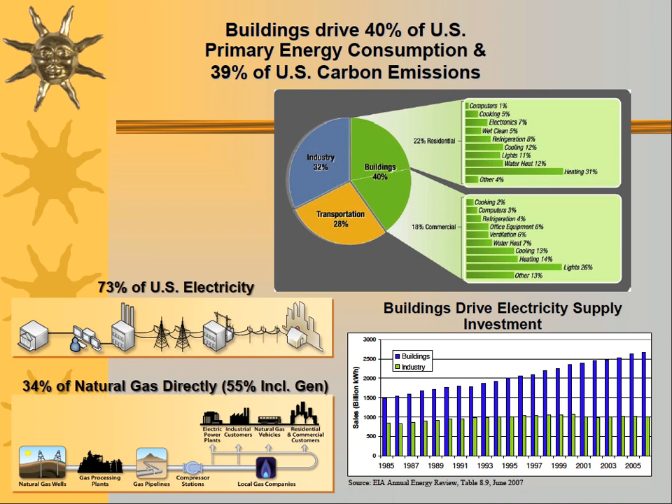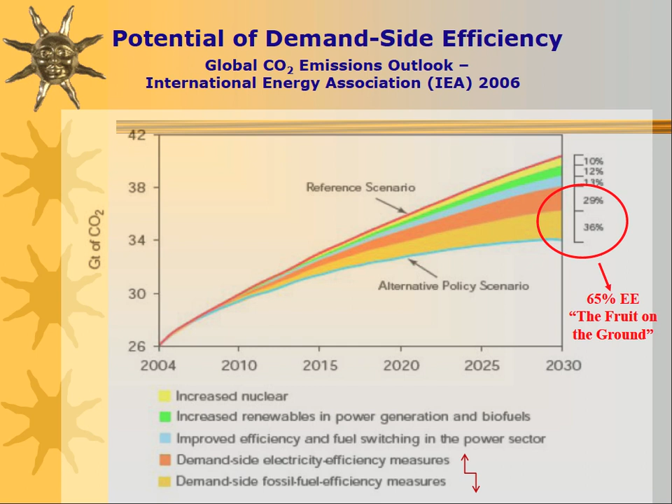Well, how do ground source heat pumps meet that objective? Ground source heat pumps, for lack of a better term, are a lever. 1 kW of electricity from the grid combined with the energy that can be stored or moved from the earth can deliver 4 to 6 kW of heating or cooling to a building or a structure. Or a simple way to put that: ground source heat pumps are 400 to 600% efficient.

So if you replace a system that is less than 100% efficient, for a conventional furnace, or a system that has a lower EER or SEER,

with a ground source heat pump, you can

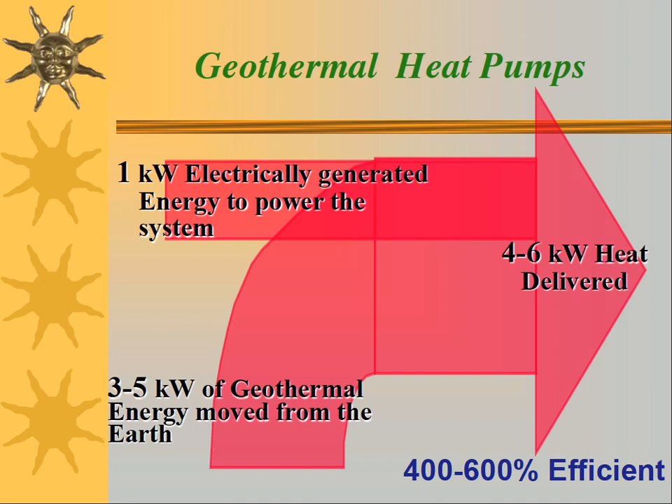lever the grid and lever that electricity to meet these energy-saving goals, and energy converts to carbon. So this is another chart that shows the same thing. This is a residential chart. Across the country, on average, heating and air conditioning accounts for about 60% of a residential home's total energy use, and hot water adds another 13%.

Well, if you put a ground source heat pump on that home, the loop takes almost 50% of that thermal energy out of the building, because that energy is coming to and from the ground. And now the remaining energy footprint of the building, the heating, air conditioning, and water heating, becomes almost the equivalent of the thermal loads associated with lighting, appliances, and miscellaneous plug loads. So ground source heat pumps take half the energy that would normally be consumed by a building. They convert that to renewable energy from the ground, and that's how we get energy savings and carbon savings.

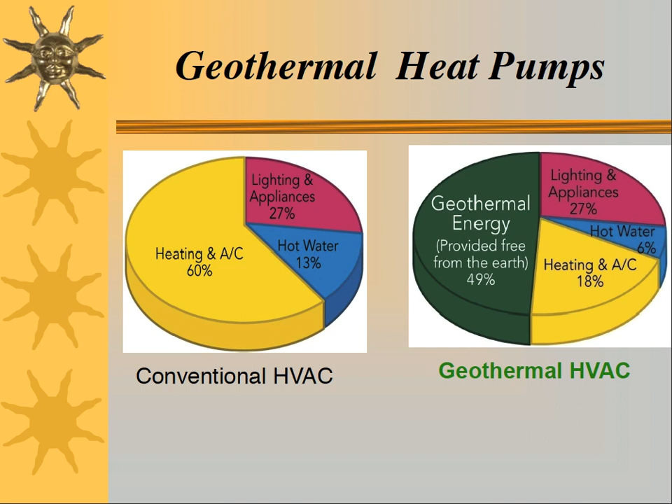Now, we've known this for a long time. This is a study of what was, at the time, one of the largest geothermal retrofits in the country. This is Fort Polk, Louisiana. This is data from the Oak Ridge National Laboratory, and the report was sponsored by the U.S. Department of Energy. There was a massive retrofit of over 4,000 homes and buildings at Fort Polk. And they went back after that retrofit and actually looked at the before and after energy usage as it was metered for the base. And here's what the ground source heat pump retrofit did.

It reduced 33% of the kilowatt hours that were being consumed by the base. It lowered the summer peak demand of the base by 43%. And it improved the electric load factor to serve the base from 52% to 62%. So in essence, it stretched the system that delivers electricity to the base so that more kilowatt hours were moved over that existing peak. That makes the electric system more efficient, and that allowed the energy company to spread their fixed cost over more kilowatt hours, which is a way that utility companies can keep pressure off of rates.

So this retrofit was done a long time ago. This was one of the first measured data in the country, and these numbers still hold today. And again, the difference in that before and after system energy use equals carbon emission savings. So the folks who study carbon, and again, this is some DOE data, have come to the conclusion that about 300,000 ground source heat pump retrofits would equal the carbon emissions that come from a conventional 500 megawatt coal plant.

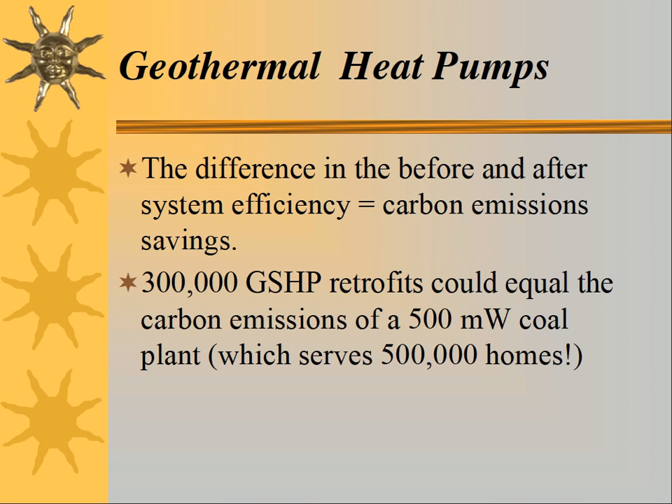Now, when we combine ground source heat pumps with carbon-free electricity from wind, solar, waves or nuclear power, we can have carbon-free electricity with a ground source heat pump, and that goes to carbon-free heating, cooling and water heating. I've done some studies here in Colorado where I'm at, and if a single-family residential home with a 4-ton heating load were to operate on carbon-free electricity, that would result in about 10 metric tons of carbon savings a year for that house due to the efficiency of the ground source heat pump.

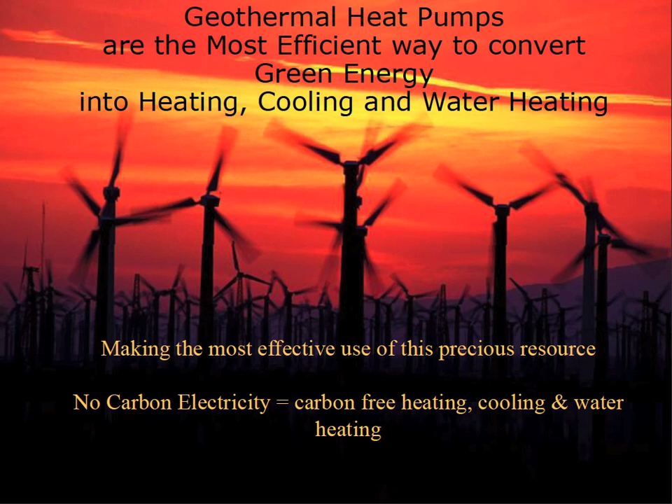Let's talk a little bit about jobs. This is my math on how many folks it takes to put in a ground source heat pump, and I think my numbers are very conservative, but I've come to the conclusion that there's at least 5 jobs created or saved for every 100 homes that are retrofitted with geothermal heat pumps. Other numbers I've seen range from 8 to 10 jobs per 100 retrofits, depending on the assumptions people make.

But at the end of the day, if we start doing more and more ground source heat pump retrofits, we'll create jobs, and those jobs will be in the construction trades, and that'll help put people back to work. And the construction trade unemployment rate is very high right now, and it's a significant contributor to the high unemployment we face as a country.

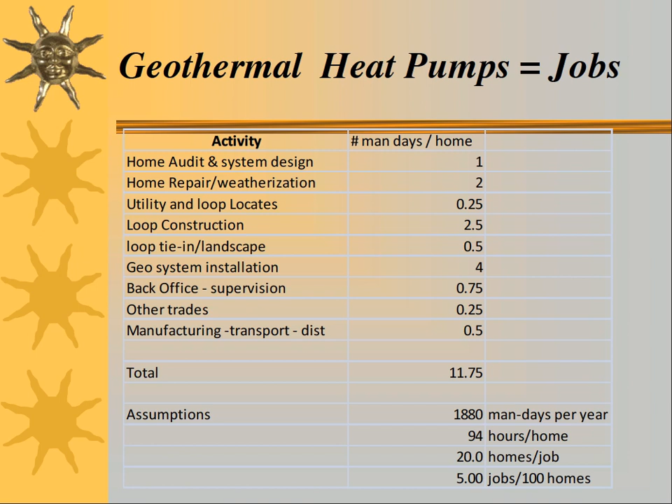Now, there's been over 1 million geothermal heat pumps installed in the United States and Canada since the 1970s. And actually, ground source heat pumps have been going in since the 1940s and 50s. So we have a strong base. The technology has been proven installation by installation over the past 20-some years. And so it's not like we're talking about a new whiz-bang technology that we need to learn about. This is an established technology that's been around for a long time.

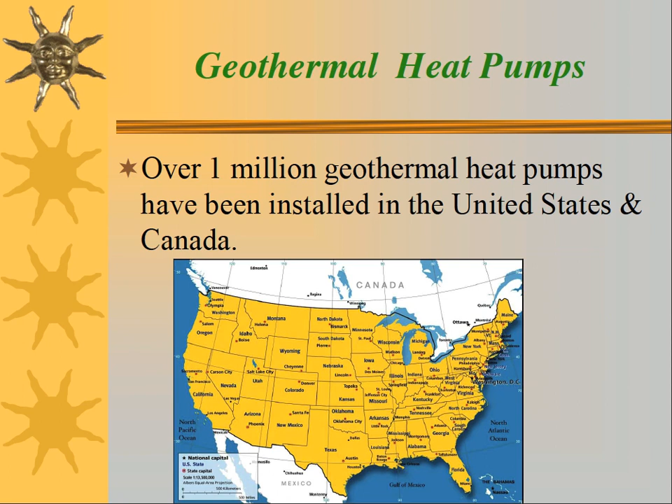There's some initiatives going on in Europe that will actually accelerate this even more. Great Britain has announced a 1 million geothermal heat pump retrofit initiative. So why are the Europeans so far ahead of the United States on a technology that really started in the U.S.? Well, the North Sea is starting to run out of gas and oil, and the next alternative for heating fuel for residential and commercial applications for Western Europe happens to be Russia.

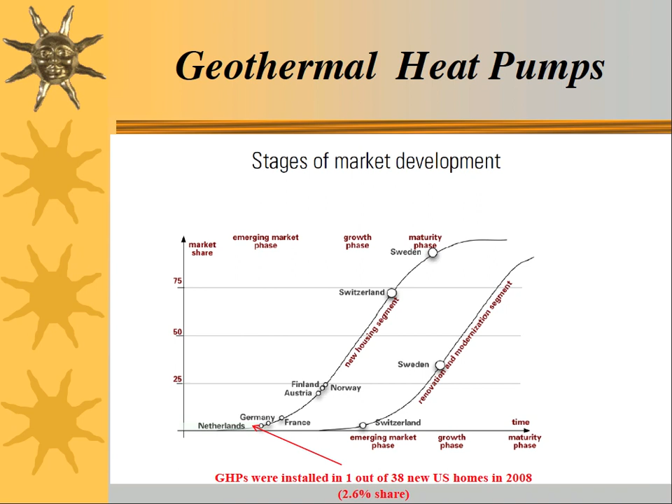Well, not to be left behind, the United States, through the Department of Energy, has decided that they really want to see ground source heat pump growth in our country. So they've announced what they call the industry roadmap for growth, and they want to see 1 million ground source heat pumps installed annually in the U.S. by 2017. Now, that would take about 3.3 million installations to get us to 2017. There's about 1 million units installed now, so between now and 2017, they'd like to see 2.3 million more installations. So that, again, looks like a pretty strong market incentive, and I'm glad you're here to listen on how you might be able to take part of that.

And why is this goal important? Well, again, if we go back to this carbon, the calculations are that would save 26 million metric tons annually of CO2, and over the lifetime of those units, if they lasted 20 years, it would be 520 million metric tons of CO2 savings.

And there's their job estimation that says they'd create up to 100,000 new jobs or save up to 100,000 jobs, again, in the construction industry if we hit that goal. Now, that sounds like a big number, but when you compare it to the existing market for heating and air conditioning replacements, that's about 6 to 8 million units a year.

So really the feds are saying if we could get to 1/6 to 1/8 of the current replacement market for conventional equipment, that would do great things for the nation's carbon goals. It would put a lot of people to work and would help people save a lot of energy.

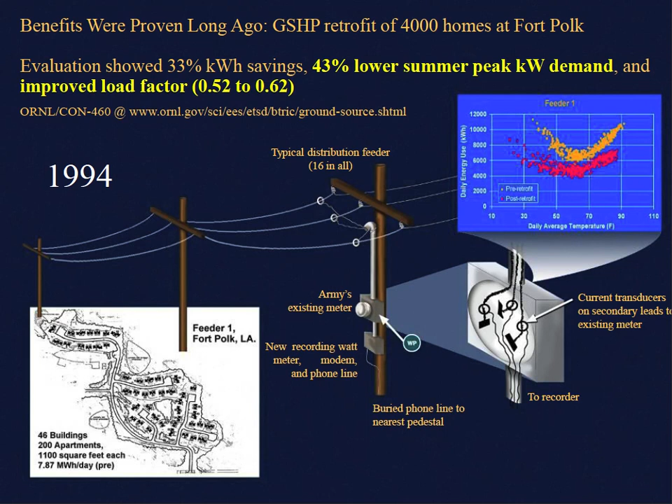Ground source heat pumps can give utilities significant peak load reductions. It depends on what part of the country you're in, but we see 500 watts to 800 watts per ton of installed ground source heat pump in residential buildings. So that means in the southeast, an average house could save 2 kW of summer peak demand, which is the same thing as a large solar PV system.

An improved load factor and all that energy savings result in lower carbon emissions, and basically, ground source heat pumps meet these big efficiency, renewable energy, and employment stimulation goals. And ground source heat pumps are the only technology that can do that without putting pressure on electric rates.

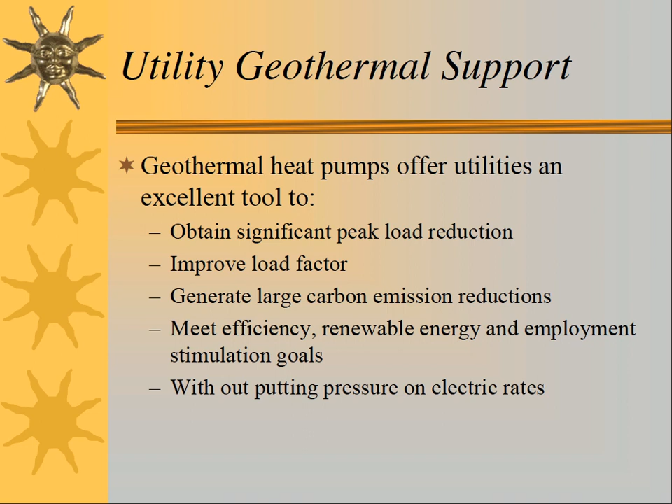Now, I don't want to be a spoil sport, but while most of us are trying to come out of this economic slump, there are some folks that actually are looking into the future. In this case, it's the NERC, the North American Electric Reliability Corporation, and they're looking into their crystal ball, and they say, when we come out of this economic funk we're in, we might run out of electricity. We might not be able to meet peak loads.

And so their forecast is, and this is pretty frightening, that in 2017, if the economy gets back to where it was in 2007, Florida, the Southeast, parts of the Great Lakes and the Midwest, and most of the southwestern Sun Belt may have power demand from a strong recovery that could be 8% or more above the current projections, which are based on slow economic growth.

And if that jump in demand occurred in a year or two, the hardest pressed regions could not add enough new power plants or transmission lines to respond in time. That's a polite way of saying if we aren't careful, we could have brownouts and blackouts based on peak demands that we can't meet because we haven't built power plants.

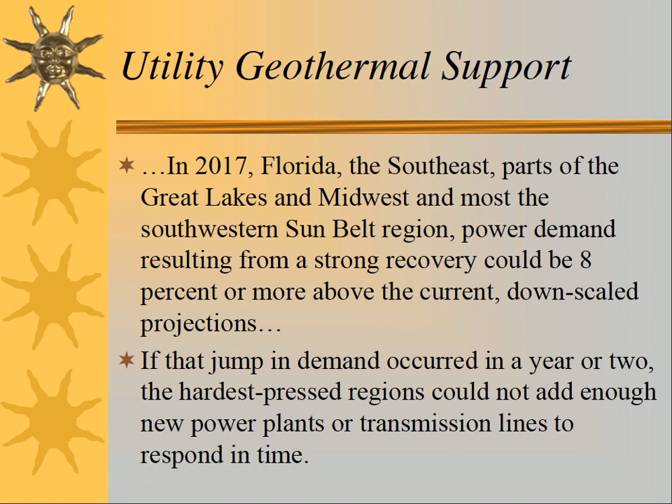Well, some of the renewable energy systems out there, including solar photovoltaics, really aren't producing much energy at 5 to 7 o'clock at night. So the only technology that really clips that peak at that point in time is a ground source heat pump.

Well, Oak Ridge National Labs has looked at all of this data, and they came up with this report in 2008, and they basically said, ground source heat pump loops really look like poles, wires, and natural gas pipelines. And they said, basically, why are we expecting building owners to finance these ground source heat pump installations up front when it should be the same as other utility infrastructure where the financing occurs over 30 or 40 years from utilities?

So if you think back, Thomas Edison invented the light bulb, but then he had to invent the electric utility industry so he could sell light bulbs. We're kind of at that point now where utilities need demand response and energy efficiency, and maybe they're going to have to finance the geothermal loops to make that efficiency show up.

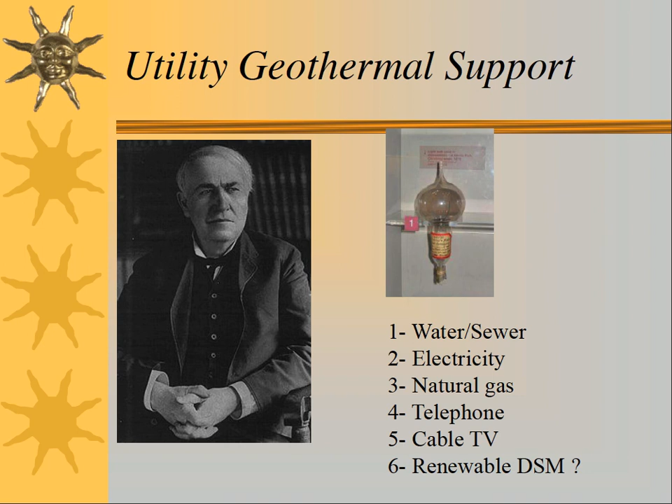So that leads us to what we call the utility geothermal loop concept, where utilities are starting to look at why don't we own these geo loops, let the heating and air guys hook up the systems, we'll contract out with the drillers and the loop installers to put the loops in, and now we can get these peak demand savings and these carbon savings that we're being asked to get in a big scale way, and the customers will get utility scale service and pricing.

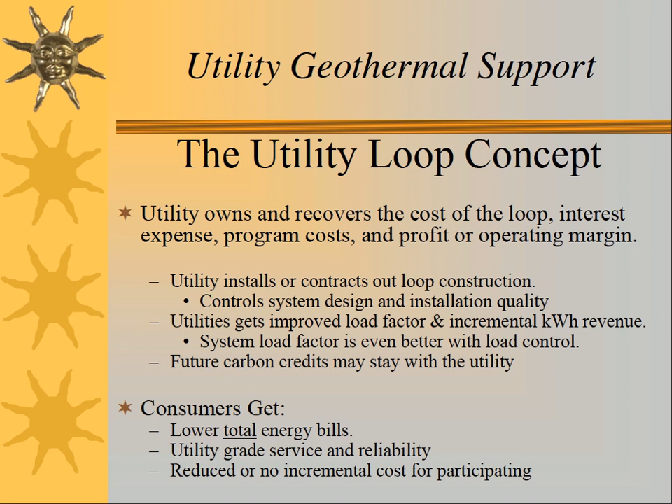Now, this is already a reality for electric co-ops. Back in 2007, there was an amendment to the Food and Energy Security Act that basically authorized the Department of Agriculture and their Rural Utilities Service to finance ground source heat pump loops as an energy efficiency measure. And any co-op in the country that wants to borrow money from the Department of Agriculture can get under 4% financing for 35 years to own ground source heat pump loops.

Not to be left behind, we're starting to see municipal utilities do the same thing, the most recent one being the city of Wyandotte, Michigan. And they just announced that they're going to offer a geothermal loop program because it helps them reduce their customers' energy bills, it improves the operation of their electric utility service, and it helps them meet their environmental benefits. And they just announced that program in August. My understanding is several other cities in Michigan are considering the same thing.

Well, I told you we'd come back to the Rural Star bill. That bill would give co-ops, if it passes and it's in both houses of the Congress, $4.9 billion in loans that they would borrow at 0% interest, and then they could make that money available to consumers for up to 3% for 10 years for energy efficiency upgrades. So there are many co-ops across the country that are saying, why don't we do a loop tariff for the loop and this 10-year 3% loan for the equipment and basically offer 100% financing for geothermal systems in our service territory.

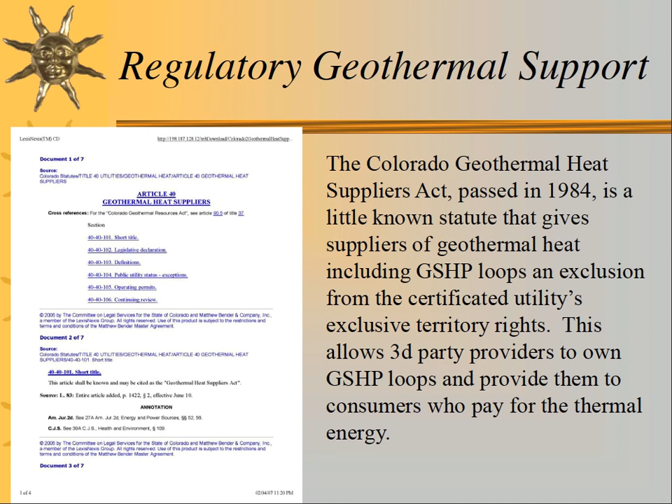We're starting to see programs that are truly rebate-driven that don't make economic sense are running into some political problems. In this case, Oregon had a very generous program for rebates for solar systems. They had to cut that rebate program in half to balance their budget. In Arizona, they had a program that was very generous utility-paid rebates, and at the end of the day, those rebates are paid by all the ratepayers.

And so basically, when the PV system was next to free, a lot of people wanted it. But then the money ran out, and the corporation commissioner, the person in charge of utility rates, said, you know, we understand that this giving big rebates and then running out of money is frustrating, but we want you to remember that the solar industry wouldn't exist without rebates. Well, the geothermal industry is not in that position because we don't want rebates. We just want help with the financing.